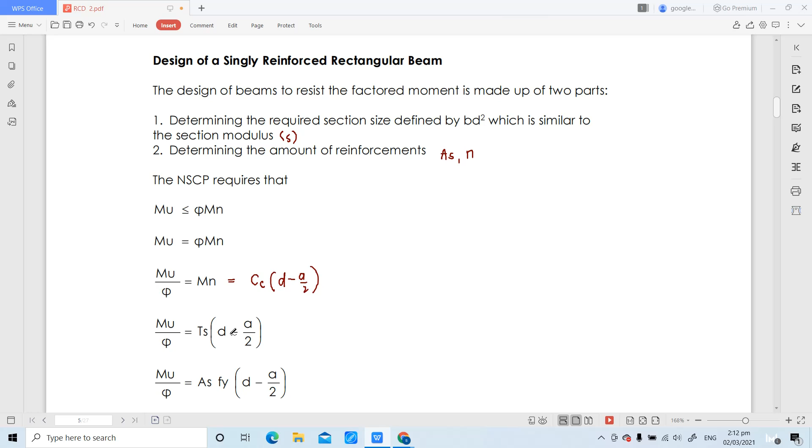And that's the one we used. Our tension force of the tension bars, Ts, is equivalent to AS Fy. So Ts should be equivalent to AS Fs, but for this we assume that our steel bar has yielded, that is why we are using Fy here.

Then we will substitute the value of A. What is the value of A? It can be computed by taking summation of forces along X, or C equivalent to T. The compressive force is 0.85 Fc prime AB, and the tension T is AS Fy. To get the value of A, divide both sides by 0.85 Fc prime B, so A will become AS Fy divided by 0.85 Fc prime B.

So here it is. When you substitute that, it has over 2, so the 2 will multiply with 0.85, and that will become 1.7.

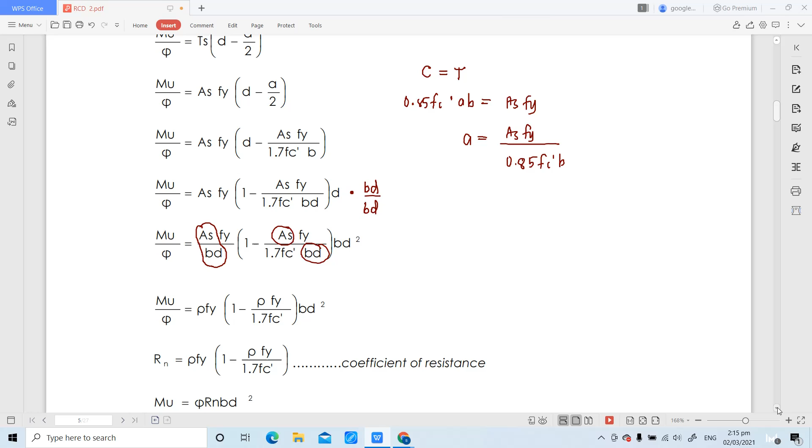And the term multiplied by BD squared, this term, is what we call the coefficient of resistance, Rn. Therefore, Rn is equivalent to rho Fy multiplied by 1 minus rho Fy over 1.7 Fc prime. So you just substitute this, and it becomes Mu over phi equals Rn BD squared.

Cross-multiply the phi, and this becomes the form: the ultimate moment is phi Rn BD squared. And with respect to the coefficient of resistance formula, when we distribute rho Fy, that will become...

Rn equivalent to rho Fy multiplied by 1, that is rho Fy, minus, it will be distributed here, that will become rho squared Fy squared over 1.7 Fc prime. And as you can see, this is a quadratic equation. There's a term with rho squared, a term with rho, and in the last term, there's no rho.

So Rn will be considered as a constant term. It follows the equation for a quadratic equation: Ax squared plus Bx plus C equivalent to 0. So this equation can be considered a quadratic equation.

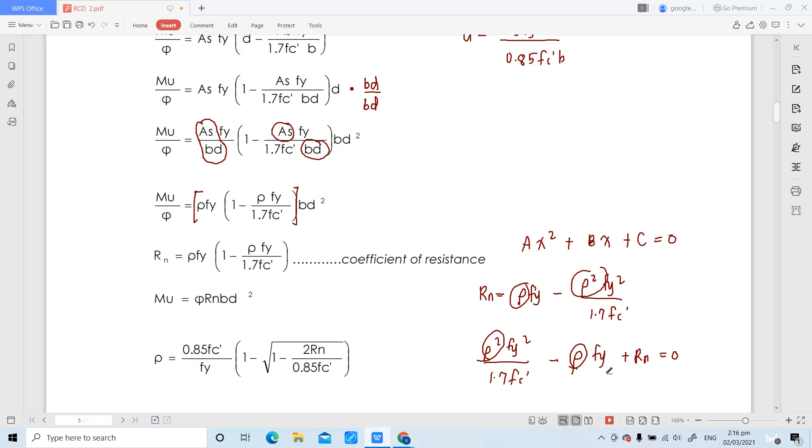If you transpose that, it becomes rho squared Fy squared over 1.7 Fc prime minus rho Fy plus Rn equivalent to 0. There's a variable rho squared, a variable rho, and a constant with no rho—that is a quadratic equation. So since it's a quadratic equation, we can solve the roots of rho using the quadratic formula.

So kapag substitute natin lahat ng term, dito A is Fy squared over 1.7 Fc prime. B is negative Fy. C is coefficient of resistance Rn. So substitute mo itong mga values na to sa ating quadratic formula, you will be able to get this formula or root for the value of steel ratio rho. That steel ratio is equivalent to 0.85 Fc prime over Fy multiplied by 1 minus square root of 1 minus 2 Rn over 0.85 Fc prime.

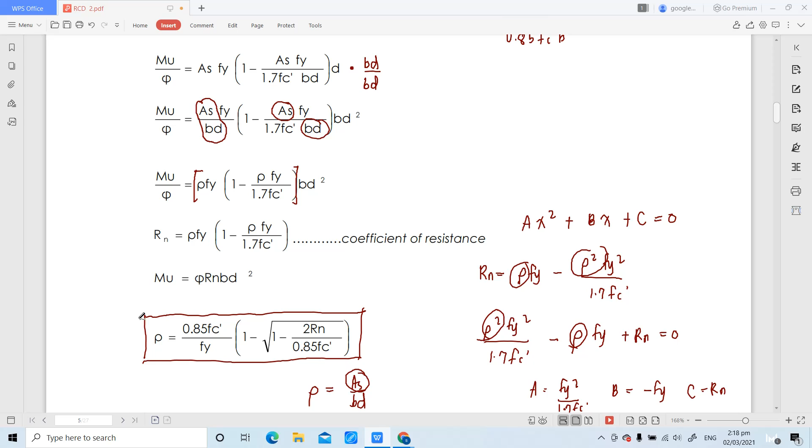Ito na yung actual steel ratio natin for the design procedure, dahil yung actual steel ratio na rho equivalent to AS over BD, hindi pa natin ito magagamit in computing the value of rho dahil yung area ng steel ay ating unknown dito sa design. So you have to compute first the actual steel ratio for you to get the value of AS. At ito yung formula ng actual steel ratio. Okay, you should memorize or familiarize yourself with respect to this formula.

Next one, we have also included here the design process. Etong steps na nakalagay dito, nasa letter B part. Yung process na nakalagay, kapag binigay na mismo sa problem yung value ng effective width B, o yung width B, tsaka yung effective depth D, kapag meron ng binigay na dimensions yung ating section, determining the amount of reinforcement na tayo.

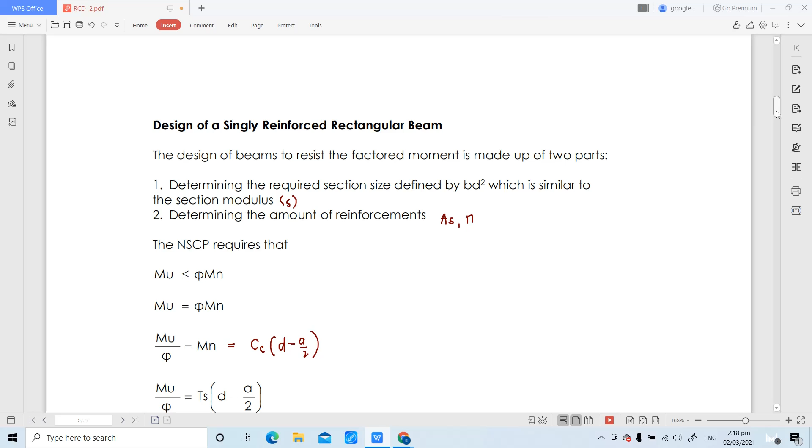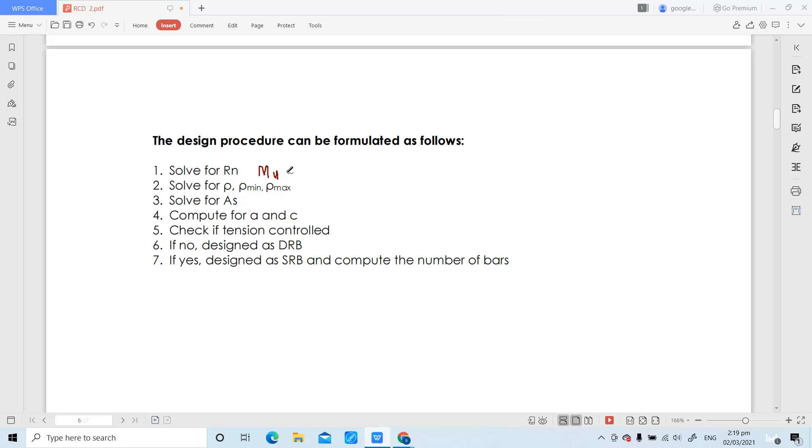And for determination of the amount of reinforcement, ito yung steps or ito yung procedure. First step is to solve for the coefficient of resistance Rn, at mako-compute niyo yan using the formula of ultimate moment, that Mu is equivalent to phi Rn BD squared, with assumptions. May assumptions tayo dyan dahil yung reduction factor phi, meron tayong tatlong classification for that, at hindi pa natin alam kung saan siya magpo-fall na classification.

So i-assume nyo. Number 2, we have to solve for the steel ratio, actual, and then check the adequacy. Solve mo yung rho minimum tsaka rho maximum also. Para maging adequate siya, a singly reinforced requirement, dapat ang actual steel ratio is less than rho max but greater than rho minimum. Kapag rho ay greater than rho maximum, that will fall under doubly reinforced beam, and we don't want that to happen.

Dahil wala pa naman tayo kay doubly reinforced requirement. Pag na-solve na natin si doubly reinforced or na-discuss na natin to, pwede na maging ganyan yung requirement natin or condition natin. But for now, dapat hindi natin makuha itong condition na to dahil singly reinforced pa lang po tayo.

Okay, so pag magpo-fall tayo dito sa condition na yan, we have to solve for AS. And AS is rho BD. Eto na siya, oh. Na-solve nyo na yung AS. Diba ito yung goal natin? Pag may binigay na ultimate moment, we can now solve for AS.

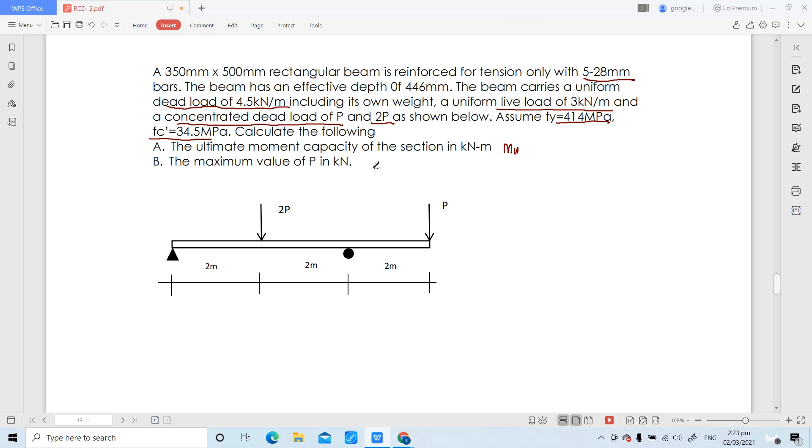Okay, so for this example, we have a 350 mm by 500 mm rectangular beam, and it is reinforced for tension only with 5-28 mm bars. The beam has an effective depth of 446 mm. The beam is to carry a uniform dead load of 4.5 kN per meter, including its own weight, a uniform live load of 3 kN per meter, and a concentrated dead load of P and 2P as shown below. We will use yield stress of steel bar 414 megapascal, compressive strength ng concrete 34.5 megapascal. We are required to calculate the ultimate moment capacity or Mu in kilonewton meter and the maximum value of P in kilonewtons. Okay, analyze the problem.

Let's draw the section first.

Meron tayong rectangular section na binigay. It is reinforced sa tension side lang with 5 28 mm diameter bars. Ang ating width ay 350 mm. Effective depth is given also 446 mm. Therefore, yung 500 na binigay doon, that will be considered as the total thickness of the beam.

And the yield stress of steel bar is 414. The compressive strength of concrete is 34.5. For this problem, this is analysis or investigation, dahil may binigay na area ng bakal or number ng bakal and then pinapa-compute yung moment capacity.

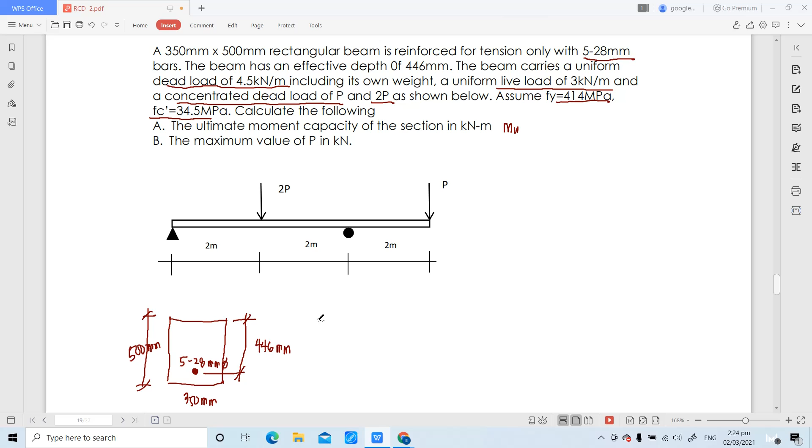If that is the case, nasa analysis pa lang tayo, hindi pa design, dahil kapag design, ibibigay yung moment capacity at ang ipapa-compute ay number of bars. Baliktad. Okay, so analysis pa rin daw. Anong unang ginagawa kay analysis?

We will check the adequacy requirement. Okay, para ma-check natin kung adequate tayo, determine first minimum steel ratio. Ang minimum steel ratio, meron tayong dalawang formula.

Nakabase yun kay Fc prime. Ang Fc prime ay greater than 31.36, so we will be using 0.25 square root of Fc prime na 34.5 over Fy na 414. What is minimum steel ratio? 0.0035.

Get the value of maximum steel ratio. This is 0.85 beta 1 Fc prime over Fy multiplied by 3 over 7. But before we get this, check first the value of beta 1. Nakadepende rin kay Fc prime. 34.5 ang Fc prime, that is within the range of 28 and 55, so that is condition number 2 or second condition.

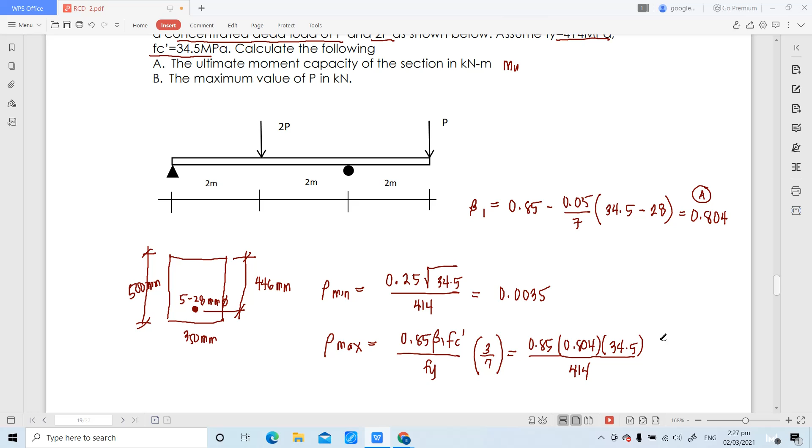804 po. Store the value as A. And then get the value of rho max. That is 0.85, ang beta 1 ay 0.804, Fc prime 34.5, Fy is 414, multiplied by 3 over 7. What is rho max? 0.0244.

0244, tama po yung naisulat ko? Opo sir. Okay, get now the value of actual steel ratio, AS over BD. Ang area ng steel, meron tayong 5, ang diameter ay 28, over B 350, effective depth of 446. What is actual steel ratio? .0197.

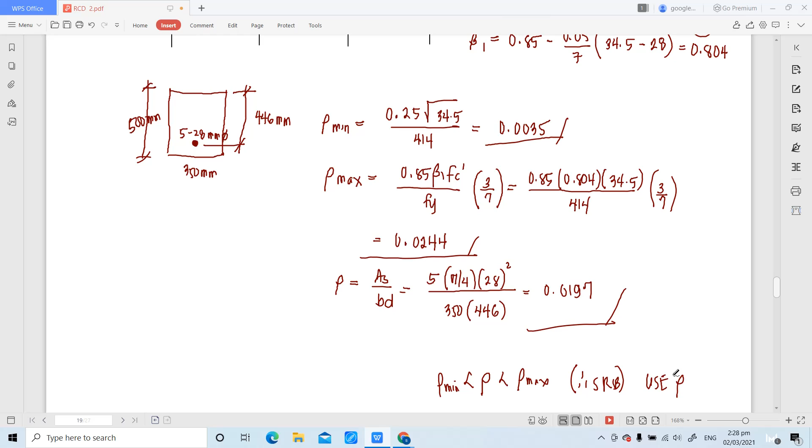Okay, now check. Compare the values of rho min, rho max, and rho. Do we have an adequate section? Nagfo-fall ba siya, less than rho max, greater than rho minimum? Opo sir. Okay, so therefore singly reinforced tayo, so use rho actual, or you will be using rho equivalent to rho actual.

Okay, let's continue. Anong next step natin dito? We will be taking summation of forces equivalent to X, summation force along X equivalent to 0. Meron tayong mga assumptions dito, assume natin steel yields, and ito yung condition na i-check: Fs should be greater than or equivalent to Fy.

Ano ang C? 0.85, Fc prime 34.5. A is unknown. The width is given 350. Tension T is As Fy. So okay daw gamitin yung 5 bakal, no need na paliitin yung value and palakihin yung value. So that is 5 pi over 4, 28 squared multiplied by Fy na 414. What is the value of depth of compression block A?

124.185. Tama ba yung naisulat ko? Opo, tama po. Get the value of the depth of neutral axis.

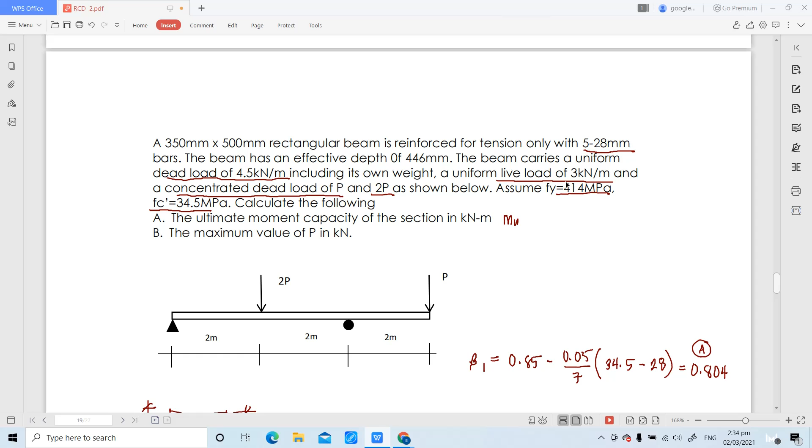Kapag i-redraw natin yan, meron tayo uniformly distributed load dito. And then meron tayong 2P here. Ito ay P. Yung ultimate moment ng section natin, that will be equated to the maximum moment ng ating beam, provided na yung ating loadings should be in ultimate conditions also.

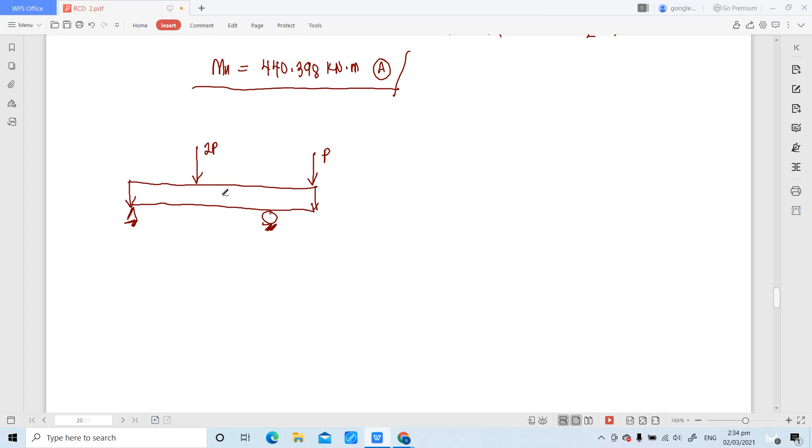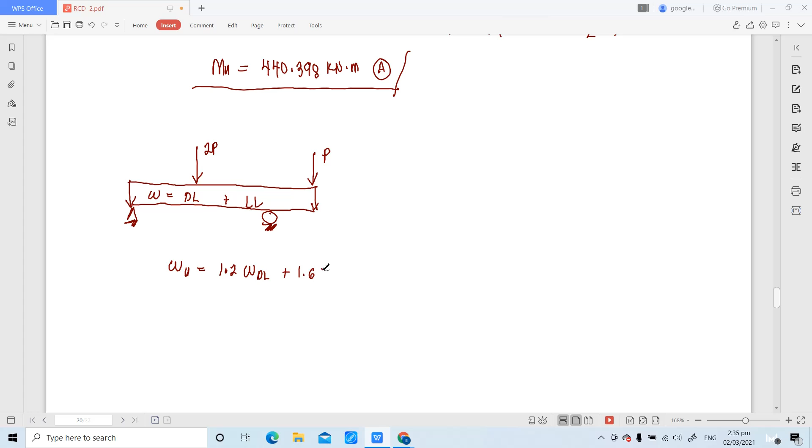Kaya lang yung mga loadings hindi pa naman ultimate load dahil hindi sinabing factored load sila. Therefore, para maging ultimate load, ifa-factor nyo siya. Eto may binigay na dead load, eto may binigay na live load. So, eto, gagawin natin ultimate load. Tama? So, that will become 1.2 dead load plus 1.6 live load, naka-factor na by 1.2 yung dead load tsaka by 1.6 yung live load.

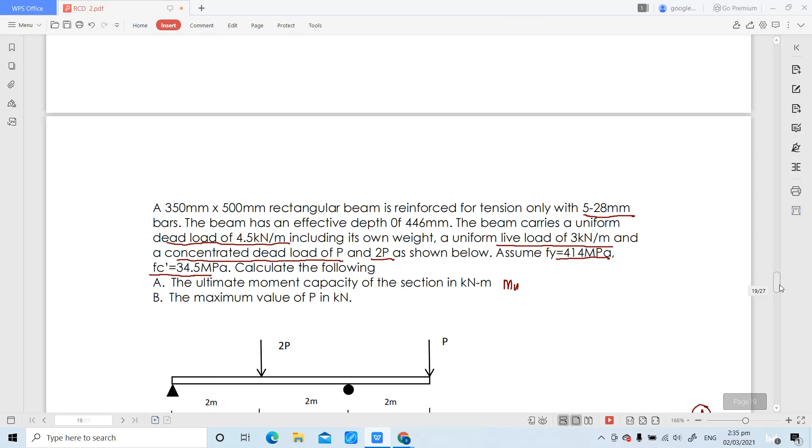So, that is 1.2. Ang dead load na binigay ay, let's check. Dead load is 4.5. Ang live load ay 3. So, dead load ay 4.5 plus 1.6 live load is 3. What is our ultimate uniform load? 10.2 kilonewton per meter.

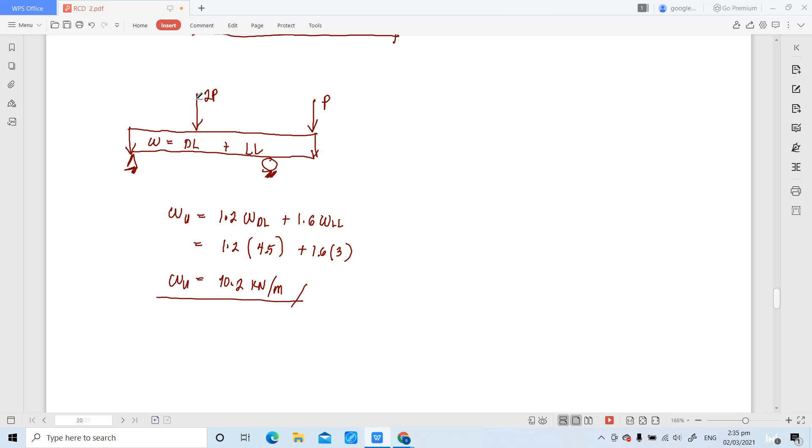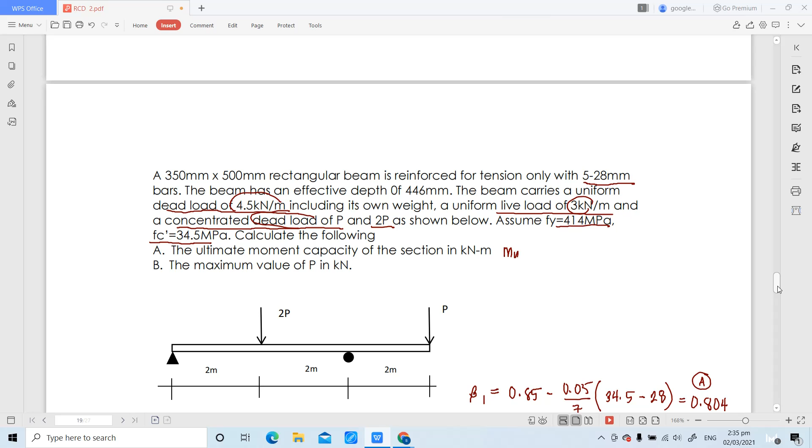Same with our 2P and P. Ano ba sinabi sa problem sa 2P and P? Concentrated dead load. Since dead load sila, may factor din sila. Ano ba yung pinakamagandang factor na gagamitin for dead load? 1.2, dahil kinonsider natin live load. So, 1.2 here. Ito ay 1.2.

No? So, ito ay magiging 2.4P. So, redron lang natin ulit yung biga natin. So, ito ay magiging 2.4P. Ito ay magiging P. Itong uniform load natin ay magiging 10.2 kN per meter. So, using this, ito ay magiging 1.2P. So, using these loadings, naka-ultimate loadings na yan.

Therefore, yung maximum moment na mako-compute dito will be equated to the ultimate moment of section. Kaya lang, nasan ba yung maximum moment ng ating beam loaded shown? So, you have to analyze that. Papasok ngayon dyan si deformable bodies or strength of materials or yung ating theory of structures.

Ito, madali pala naman, simply supported. Therefore, kahit ang method na gagamitin nyo ay shear and moment diagrams or shear and moment equations. So, let's get the value of maximum moment. Meron tayong reactions sa supports.

Say this is point A, ito ay point B. This is reaction at A, reaction at B. For us to get the maximum moment, get first the value of the reactions at support.

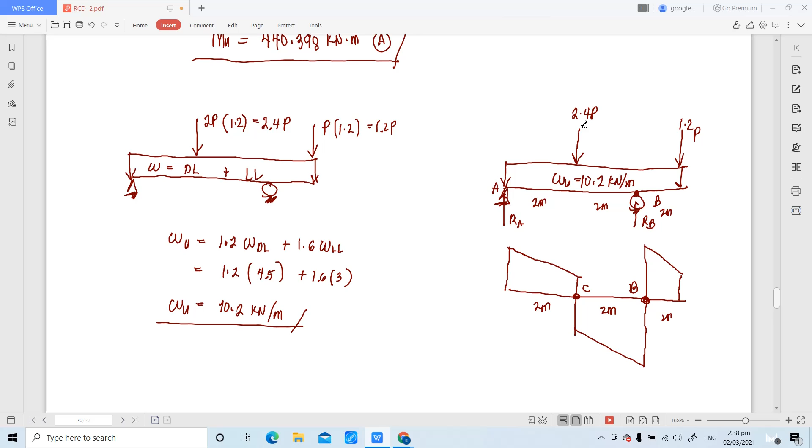2 meters ito, 2 meters, 2 meters. No need to compute where is the location of maximum moment. Ito ay 2 meters, 2 meters, 2 meters. Ito ay si point B. Say this is point C, yung point of application ni 2.4P. So, nakay point B, nakay point C yung maximum moment values natin.

So, we will analyze that. Bago natin i-analyze, determine first the reaction at A. So, paano natin masasolve yung reaction at A? We will take summation of moment at point B. We will take clockwise rotation is positive. So, for that, we have reaction at A multiplied by a perpendicular distance of 4 meters.

Tama? Yung 2.4P, anong galaw? Papunta kay point B, counter. So, that is negative moment.

2.4P multiplied by perpendicular distance of 2 meters. Yung 1.2P papunta kay B clockwise, so positive moment. 1.2P multiplied by a perpendicular distance of 2 meters ulit.

How about uniform load? Papunta kay point B. Is that a negative moment or a positive moment? Positive ang galaw? Or negative? That should be negative, counterclockwise, dahil mag-a-act yun sa gitna, di ba? Ang gitna niya ay 3 meters. So yan na yung load, papunta doon, counterclockwise. So minus 10.2.

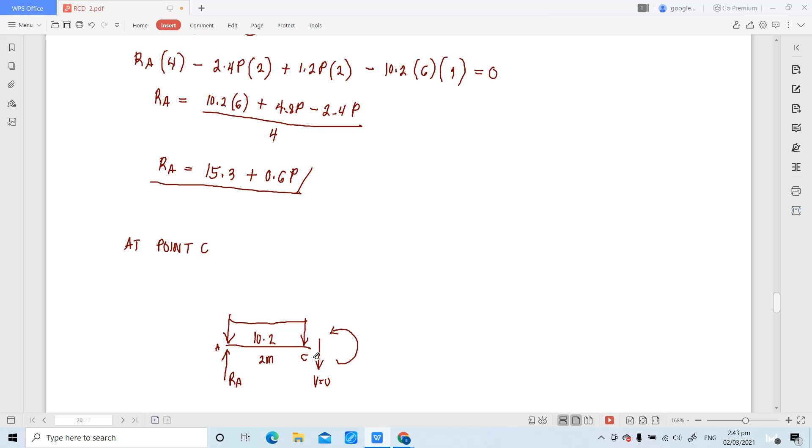So para makompute sa Mmax, we will take summation of moment at point C, equivalent to 0. Sabihin natin, lahat ng clockwise rotation ay positive. So yung Mmax, that is negative yung rotation niya with respect sa positive rotation, so that is negative Mmax. And then yung RA, papunta kay point C, positive rotation, plus RA times 2 meters. Yung 10.2 papunta kay point C, counterclockwise, so minus 10.2 times the base 2 multiplied by the moment arm, yun yung distance ng centroid niya papunta kay point C, 1 meter, equivalent to 0.

Mmax yung kinukuha, di ba? Lipat mo dun sa kabila para maging positive. Ano natira? Reaction at A. Ano ba yung reaction at A? 15.3 plus 0.6P multiplied by 2, minus, ito ay 20.4.

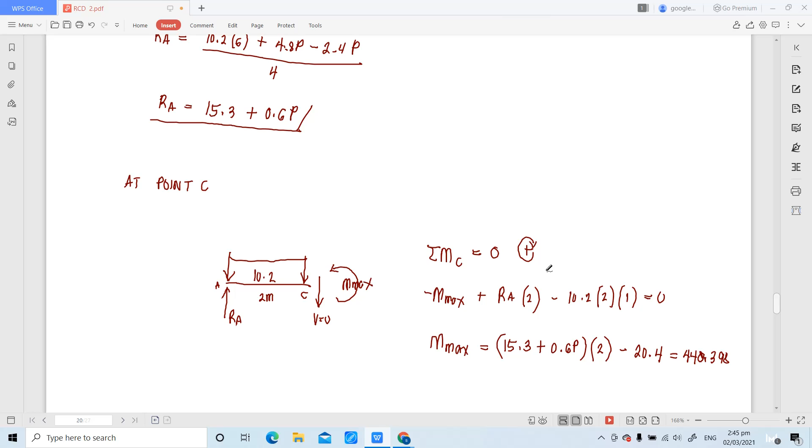Yang Mmax na yan will be equated to the ultimate moment of the section, dahil etong loadings na ginawa natin ay naka-ultimate load na. So ito ay equated to 440.398 kilonewton meter, naka-store na yan kanina, check nyo na lang po. Naka-store kay A, 440.398. And as you can see sa ating equation, load P na lang yung unknown. So you can now compute for the value of P. Ano po yung value niya?

358.4982. Same answer po dun sa iba? Opo sir. Okay, yan yung isang value ng P. Opo, pero meron pa tayong isang makokompute na P dahil dalawa daw yung points of maximum moment natin.

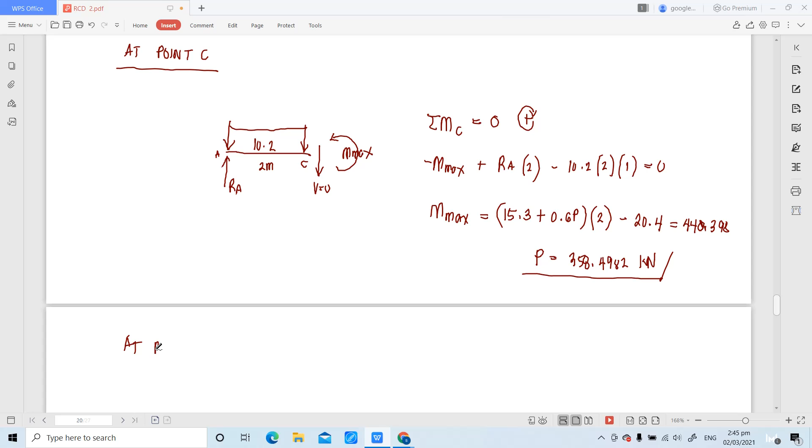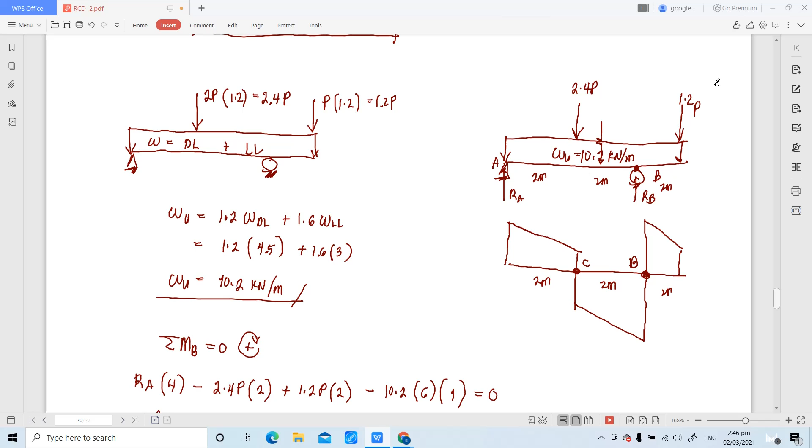Okay, so let's consider at point B. Isa-section din natin yan, sa roller support. Kapag nag-section tayo sa roller support, mas magandang i-consider yung right side section kaysa yung left side. So kapag i-consider natin yung right side ng point B, ito yung makikita nating loading.

Ito si 1.2P, ito si 10.2 kN per meter, ito si point B. Yung reaction sa roller support at point B, hindi rin natin i-consider dahil doon tayo naghati. Ito ay 2 meters. Pagpalagay natin, yung sa point B ay maximum negative moment.

Pag negative moment, considering right side section, ganyan yung galaw. Pero pag sinabi yung maximum positive moment siya, ang galaw niya ay ganyan - it should be clockwise, considering right side section. Dito kinonsider lang natin negative moment yung makokompute natin kay point B.

So this is Mmax. Para makompute yung Mmax na yan, we will take summation of moment at point B, assuming clockwise rotation is positive. So eto, negative - that is negative Mmax dahil siya ay counterclockwise.

Okay, negative. Yung 10.2 papunta kay point B, clockwise, so positive: 10.2 times the base 2 multiplied by perpendicular distance 1. Yung 1.2P papunta kay point B, clockwise din, plus 1.2P multiplied by perpendicular distance of 2 meters.

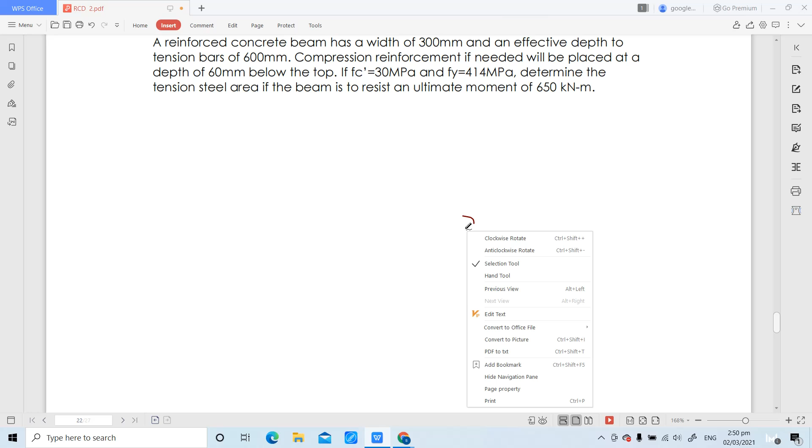Okay, so we have here a reinforced concrete beam has a width of 300 millimeters and an effective depth to tension bars of 600 millimeters. Compression reinforcement, if needed, will be placed at a depth of 60 millimeters below the top. If the compressive strength of concrete is 30 megapascal and the yield stress of the steel bar is 414 megapascal, determine the tension steel area if the beam is to resist an ultimate moment of 650 kilonewton meter.

So yung problem na ito is design problem dahil merong binigay na moment capacity, at ang pinapakompute yung required tension steel area AS. Dito sa problem, sabi dyan, compression reinforcement if needed will be placed at a depth of 60 mm below the top. Pag merong compression reinforcement, doubly reinforce tayo. So i-check natin kung doubly reinforce ba itong problem na to or singly reinforce.

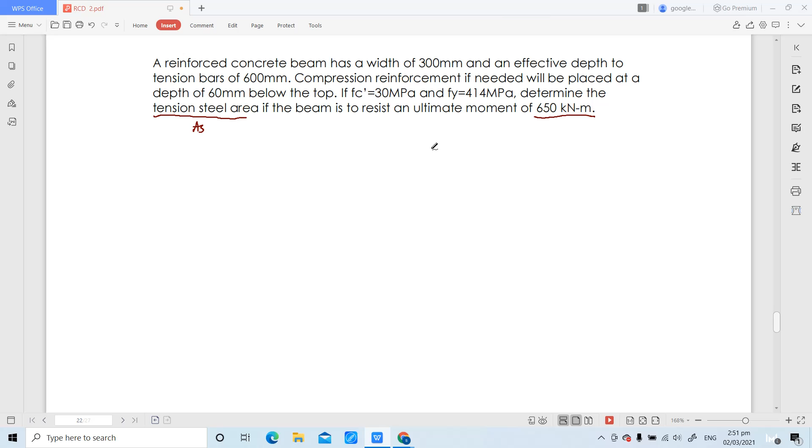So para ma-check natin, first step, mapapansin nyo itong problem na to, meron ng width na binigay, meron ng effective depth. So determination of the amount of reinforcement. At para dyan, first step is to compute the value of Rn, coefficient of resistance, mako-compute yun using Mu equivalent to phi Rn B d squared.

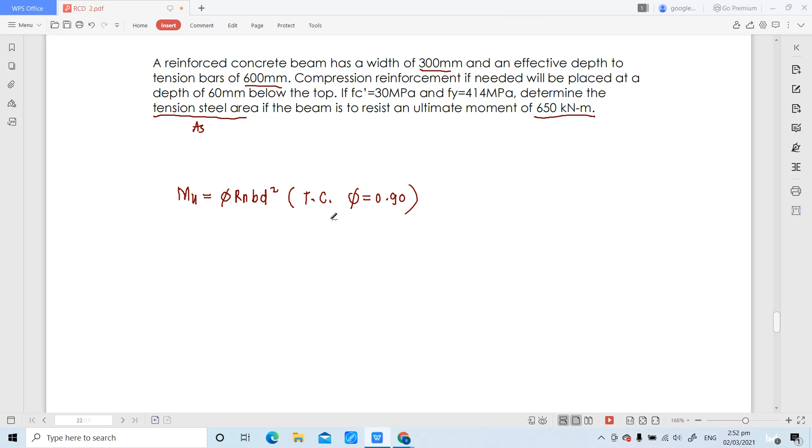Dito meron tayong i-assume na condition dahil yung phi, meron tatlong condition o classification. Assume natin na siya ay tension controlled - ito yung kailangan natin. Mas magandang dinedesign natin yung biga natin or structural element natin as tension controlled kaysa sa ibang classification, dahil mas maganda yung kind of failure na to compared to compression controlled. But we have to check kung tamang tension controlled siya.

So Mu is given 650 kilonewton meter. You have to observe consistency of units - i-convert mo into Newton millimeter, gagawin mo siyang, o magmumultiply ka ng 1 million, o times 10 raised to 6. At sa pamamagitan nun, magiging Newton millimeter na yung ating unit.

Equivalent to phi - in-assume natin tension controlled, so that is a value of 0.90. Rn is unknown. The value of width B is 300 millimeters, the value of effective depth d is 600 millimeters, quantity squared. As you can see, Rn is unknown - masosolve nyo na. Ano po yung value ni Rn?

6.687 Megapascal. Since mm squared cancels, it will convert to Newton. So, Newton per mm squared will be a megapascal.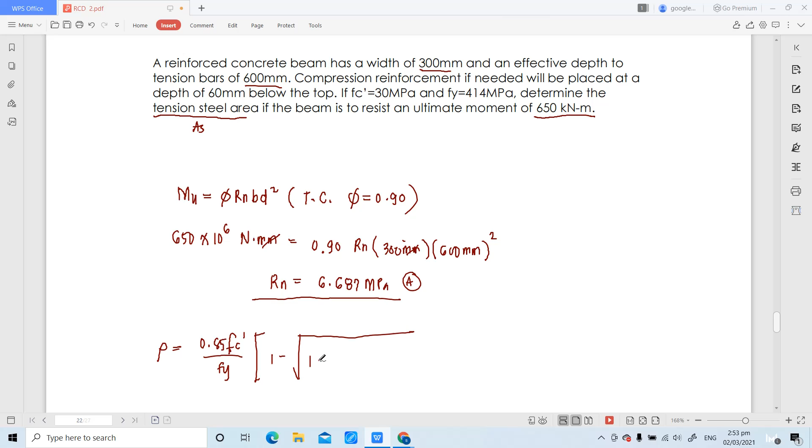Store the value of Rn as A. Once we compute Rn, we can now compute the actual steel ratio, which is rho. That is 0.85 Fc prime over Fy multiplied by 1 minus square root of 1 minus 2Rn over 0.85 Fc prime.

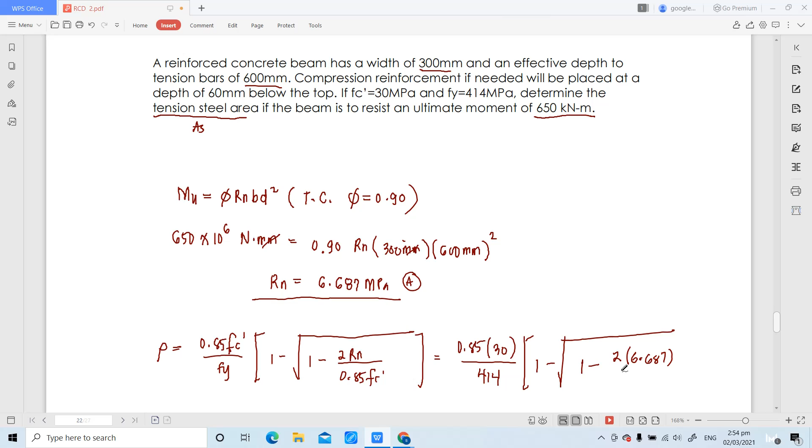Now substitute the values. We have 0.85, the Fc prime given as compressive strength 30, over Fy 414, multiplied by 1 minus square root of 1 minus 2 multiplied by Rn, stored as A, which is 6.687, over 0.85 Fc prime 30.

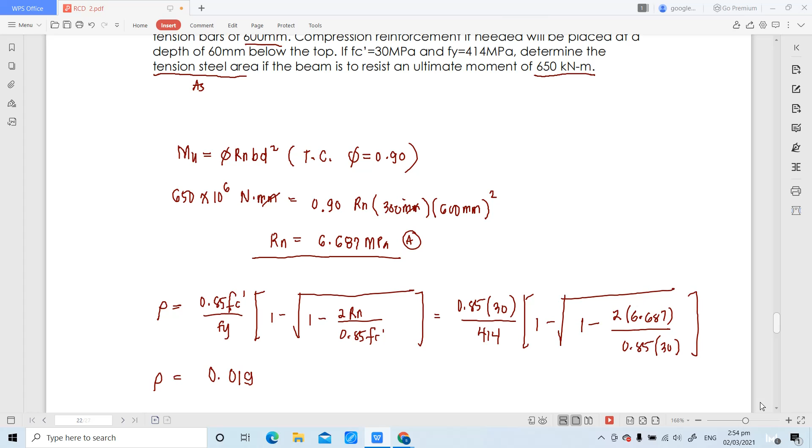So what is the value of the actual steel ratio? 0.019. Same answer as the others? Yes, sir. Check the adequacy requirement.

Get the value of rho minimum and rho maximum. For rho minimum first - rho minimum is based on Fc prime. So if Fc prime is less than 31.36, the rho minimum formula is 1.4 over Fy, which is 414.

What is our minimum steel ratio? 0.00338. Okay, how about rho maximum?

Formula: 0.85 beta 1, Fc prime, over Fy multiplied by 3 over 7. But first, analyze beta 1. Beta 1 depends on Fc prime. So if greater than 28 and less than 55, the formula is based on that. Solve for it first.

That is 0.85 minus 0.05 over 7 multiplied by 30 minus 28. What is beta 1? 0.836. Same answer as the others?

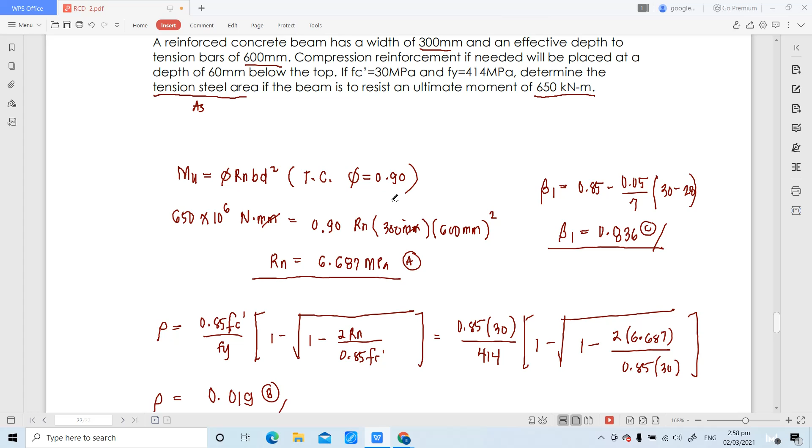So when we assume, it appears adequate. Let's check if that's correct. Since it's adequate, we will be using rho actual. Once you've computed rho actual, you can now compute AS. AS is rho times B times D. The rho to use is the rho actual, because it's within the range of minimum and maximum.

So stored as B, 0.019, multiplied by the width given, 300, effective depth 600. So multiplied by 300, multiplied by 600. What is our area of tension steel? 3,441.695 mm squared.

This is our requirement, determination of AS. But we're still not sure, as I said, so we have to check if that's correct. To check, get the value of A and C and Fs by taking the summation of forces along X.

So what is C? 0.85, the Fc prime is 30. The value of A is unknown. The value of B is 300. T is AS times Fy.

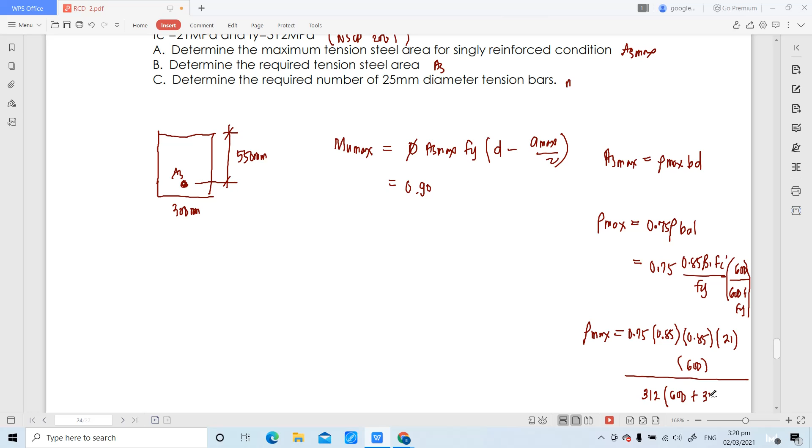That is the formula of Rho max. Compute for Rho max using these values: 0.75, 0.85, and beta 1 which depends on Fc prime. Fc prime is less than 28 and greater than 17. For the first condition, beta 1 is 0.85, Fc prime is 21, multiplied by 600 over Fy which is 312, multiplied by 600 plus Fy, so 600 plus 312. What is Rho max?

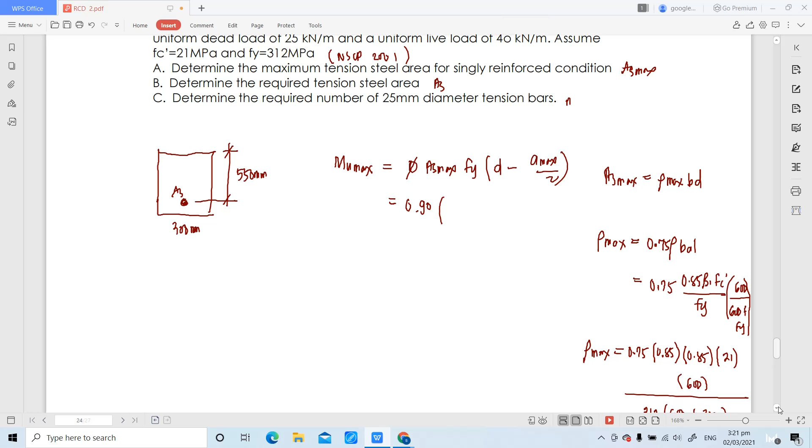Use the AS max you computed, that is 3959.17, Fy given as 312, multiplied by effective depth D 550 minus A max which we don't have yet. How can we compute A max? We will take summation of forces along X. C equals 0.85 times Fc prime which is 21, times A max, multiplied by B which is 300. This equals AS max, which is 3959.17 multiplied by Fy 312. What is our A max?

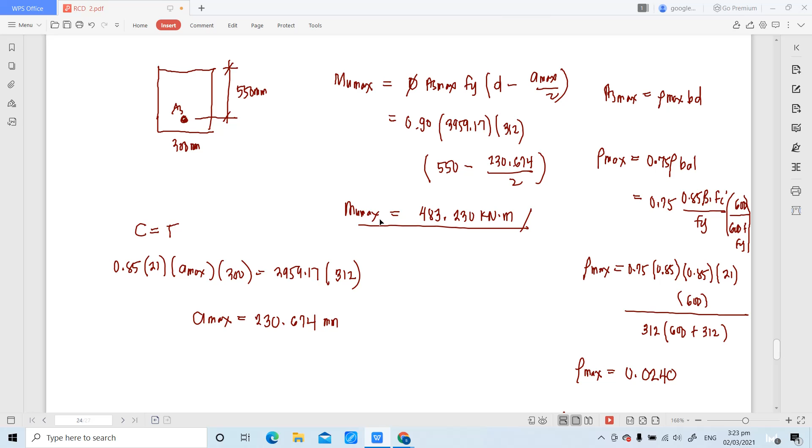Let's check if it passes as singly reinforced. Get the value of MU since none was given yet, and we can compute the ultimate moment using our loaded beam, which is simply supported over a span of 6 meters, carrying a dead load of 25 and a live load of 40. For a simply supported beam carrying a uniform load, there's a formula for that.

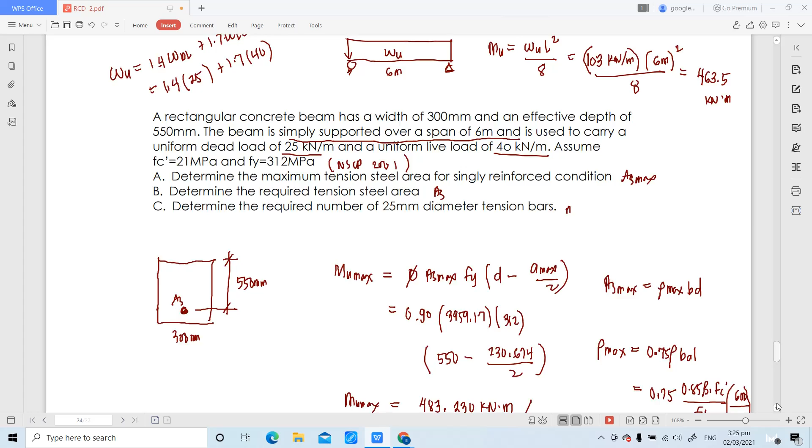Okay, store that value. Compare your MU with MU max. MU is 463, MU max is 483. Therefore we can consider that MU is less than MU max. If MU is less than MU max, that is singly reinforced. If MU is greater than MU max, that would be doubly reinforced, but that is not our case. So MU is less than MU max, so this is singly reinforced.

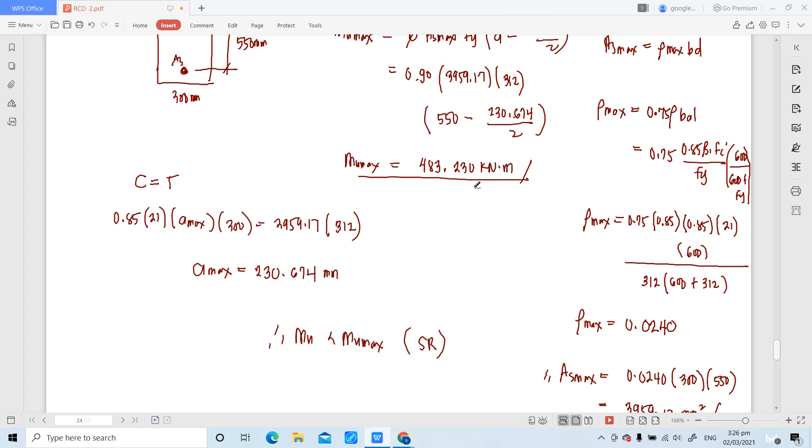So we are singly reinforced. So being singly reinforced, we can now design our beam as singly reinforced. What's the first step? Determine the value of A. Get the value of A, then get the value of AS.

For A, we will use the MU formula: phi times 0.85 FC prime AB, times D minus A over 2. Our MU is fine since it's less than MU max, that's 463.5 - convert this to Newton mm. Phi under 2001 is always 0.90. And this is 0.85, Fc prime is 21. A is unknown, B is 300, effective depth is 550, minus A over 2.

So you can compute for the depth of compression block A. What is the depth of the compression block?

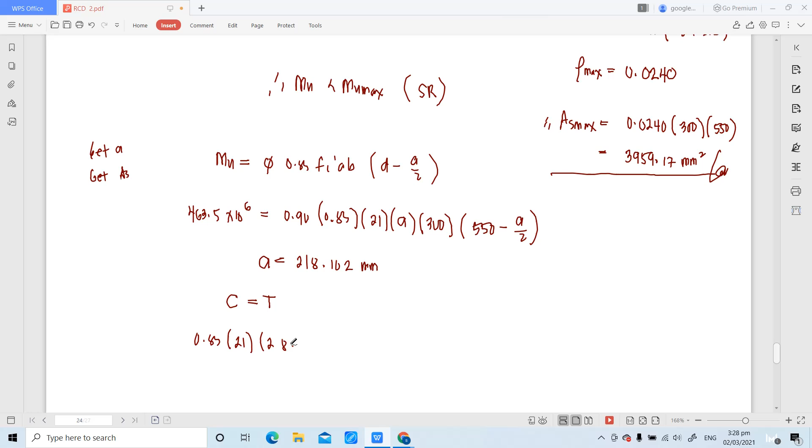218.102 is A, 300 is B, equivalent to AS which is unknown. Same answer po dun sa iba. Okay, so pag same answer, you can now solve for AS by taking summation of forces. Ang C ay 0.85, FC prime na 21. Ang FY, 312. What is the value of AS?

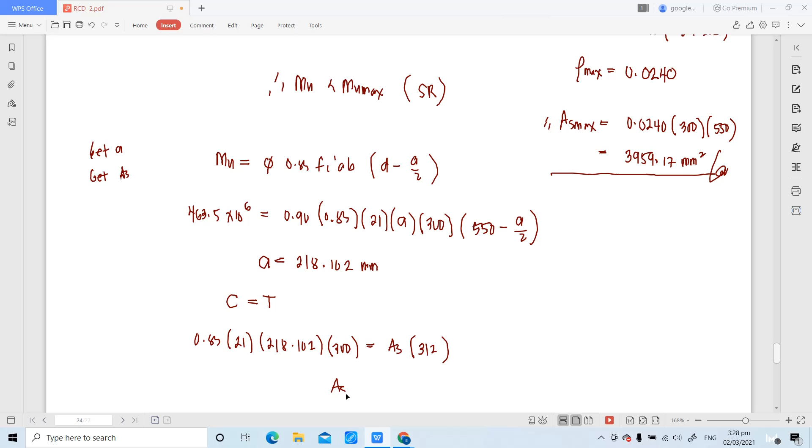3743.382 square millimeters. Same answer po sa iba. Meron na kayong AS. Kapag na-compute yung AS, ito ang first requirement, AS max, second requirement AS.

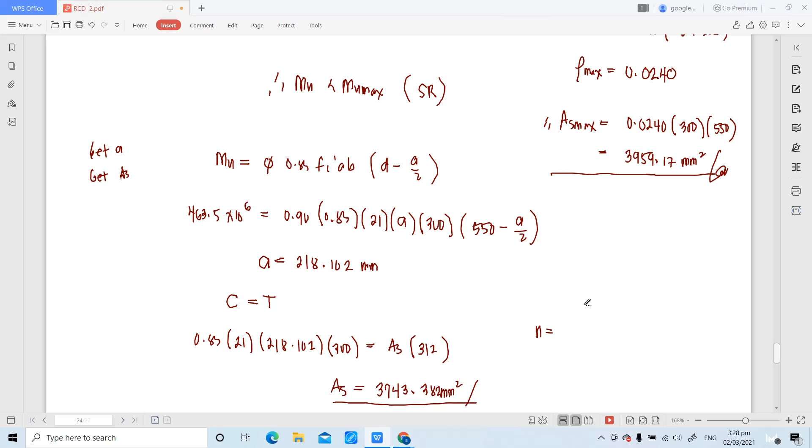Pag na-compute yung AS, you can now solve for N, the number of bars, and that is AS over AB. Ang AS natin ay 3743.382 over AB, pi over 4. Ang diameter daw ng bar na gagamitin ay 25 mm, binigay sa problem. So, 25 quantity squared, at ito ay round up po palagi. Ano po yung value ni N? 8 po. Okay, 8 pieces, yan ang sagot natin.

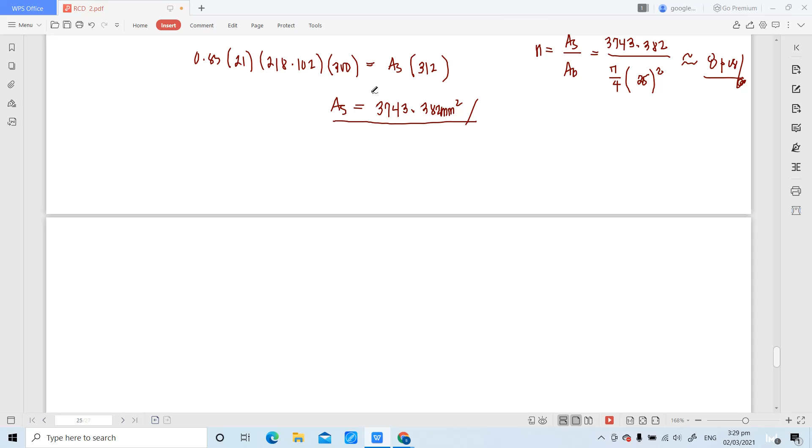For 2001, what if gagamit naman tayo ng 2010 tsaka 2015? Eto, bago nyo gamitin si AS dito guys ha, kasi dito, na-check lang natin kay maximum, so check nyo din siya kay minimum. Dapat yung AS na to ay greater than kay AS minimum.

Determine nyo nga kung greater than siya kay AS minimum. Ang rho minimum ay 1.4 over Fy, dahil ang FC prime ay less than 31.36. 1.4 over Fy na 312, ang B ay 300, ang D ay 550. Tama bang greater than yung AS kay AS minimum? Greater than tayo, okay yung 3743, okay.

What if naman kapag gagamit tayo ng another code, sabi nating 2015? Actually, 2010, 2015, parang parehas din, walang magbabago. Now, ano unang gagawin daw natin? Get the value of Rn. Paano ma-determine yung Rn? Mu is equivalent to phi Rn Bd squared.

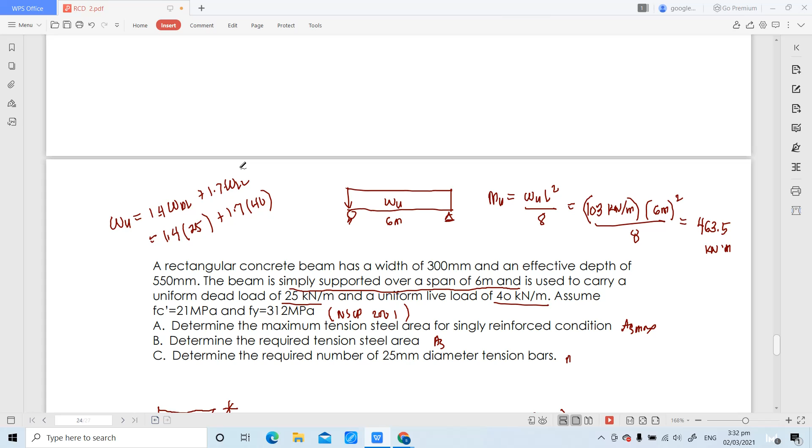So, mapapalitan yung WU. Solve for W. So, WU is 1.2 dead load na 25, 1.6 live load na 40. 25 ang dead load, live load ay 40. 94 kilonewton per meter. By that, we can compute for Mu. Ang Mu ay WU L squared over 8, that is 94 multiplied by 6 squared over 8.

What is Mu? 423 kilonewton meter, at yun yung gagamitin natin sa pagde-design. So, this is 423, convert it into Newton millimeter, magmumultiply ng times 10 raised to 6. Phi, inassume natin tension controlled.

Ang Rn, unknown. Ang B ay 300, effective depth D is 550. What is the value of Rn? Kindly compute: 2848.485. It should be squared. Ano po yung Rn? 5.179. Okay, store the value as A.

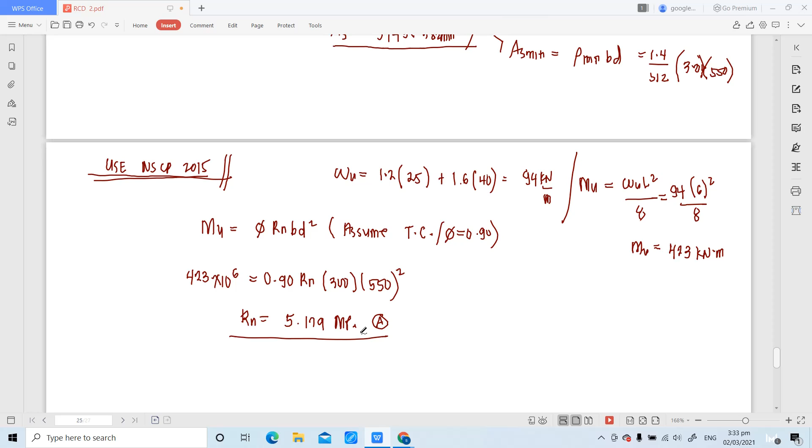Hindi tayo nag-round off. Pag na-compute yung Rn, we can now compute for the value of actual steel ratio, Rho. That is 0.85 Fc prime over Fy multiplied by 1 minus square root of 1 minus 2Rn over 0.85 Fc prime. So, this is 0.85, ang Fc prime natin 21 over Fy 312, 1 minus square root of 1 minus 2 Rn 5.179 over 0.85, ang Fc prime ay 21. So, what is actual steel ratio? 0.0201.

Okay, now check the adequacy, get the value of rho minimum and rho maximum. Ang rho minimum, 1.4 over Fy, that is 1.4 over Fy 312. Ano yung rho minimum? 0.0045, okay, how about maximum? 0.0208.

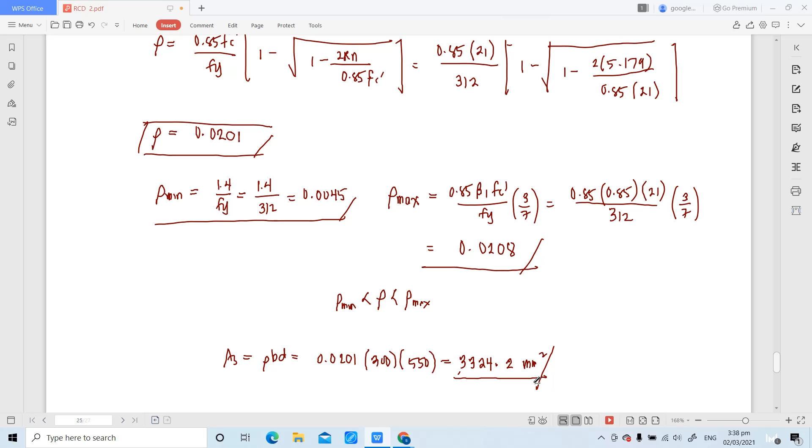Take summation of forces along X. That is 0.85 FC prime ay 21. The value of A is unknown. The value of B is 300. Tension T is AS na 3324.2. Ang Fy, 312. What is the value of A?

One nine nine, 199.681. Okay, get the value of C. Ang A ay beta 1 C. Ang beta 1, 0.85. So we can get the value of C.

227.86 millimeters. Check the assume condition. Get the value of Fs, 600. Effective depth na 550 minus C, 227.86 over 227.86. What is Fs? 848.257 megapascal. Ngayon, tama ba yung mga in-assume nating condition? Tension controlled ba tayo? Ang Fs ba ay greater than kay 1,000?

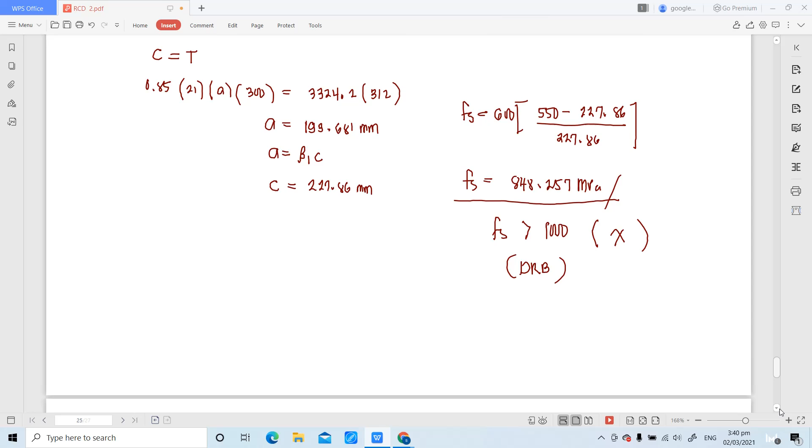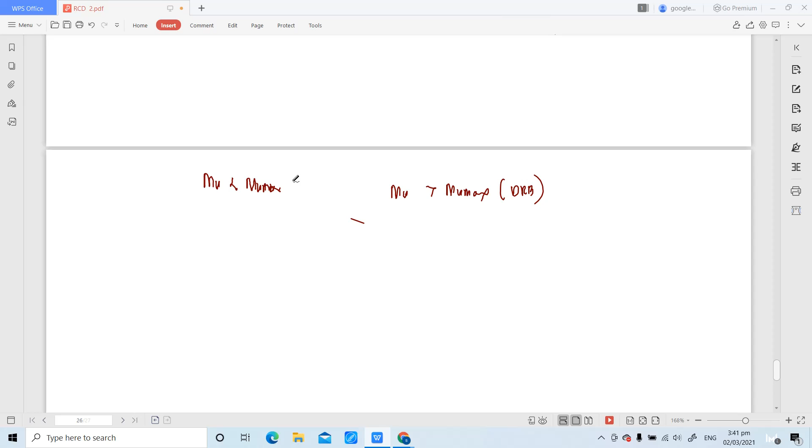Check natin kung doubly reinforced talaga siya using yung isang formula natin kanina. Check natin kung yung MU ay less than ba kay MU max, o yung MU ay greater than kay MU max. Kung hindi, ito doubly reinforced, ito singly reinforced. Yung MU natin na determine na, di ba? MU is 423 kilonewton meter. So how about MU max?

Determine natin. MU max is equivalent to phi, sabihin natin 0.85 beta 1, 0.85 FC prime AB effective depth minus A over 2. So para maging maximum yan, yung A dapat siya ay maximum condition, A max. Pwede rin yung isa, yung kay phi AS max Fy multiplied by D minus A max over 2. Either way, parehas lang po yung makocompute natin.

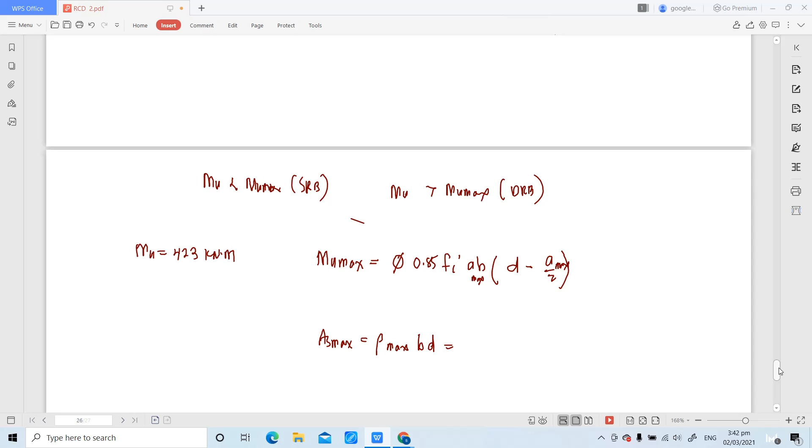Now, compute for A max. Paano makocompute yung A max? By taking summation of forces along x-axis. Pero before that, determine first AS max. Ang AS maximum ay rho max BD. Ang rho max na compute nyo na kanina, ang rho maximum ay 0.0208.

Tama po? Paki-store nga yung value nito, para nito yung nag-round off. 0.85 by 0.85 by 21 by 3 over 312 by 7. Store na.

Okay, now compute for AS max. That is rho max 0.0208. B is 300, effective depth ay 550. Ano yung AS max? 3438. 0.2. 3,438. 38.22, 38.8, 0.2? Tama ba yung 0.2? 0.23 or 8? Point 0.82. Okay, store yung value, AS max.

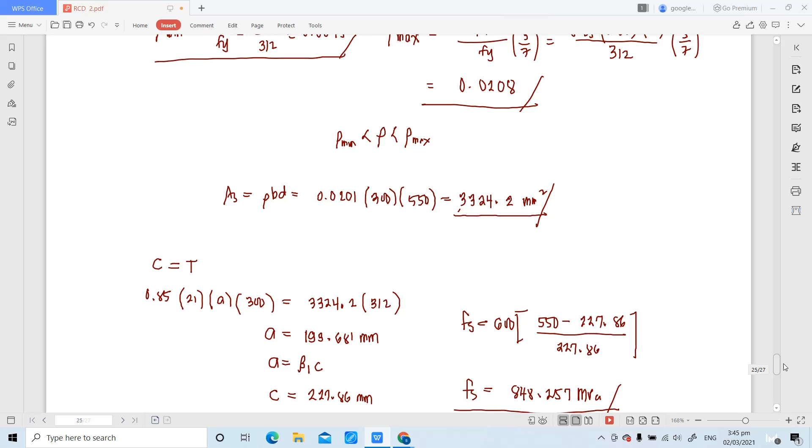200.357. So, madetermine na natin yung MU max. Bago natin madetermine yung MU max, determine first phi. Under 2010-2015, ang reduction factor phi na compute nyo na kanina. Naka-store pa ba kanina? Hindi pa, hindi pa natin na-compute.

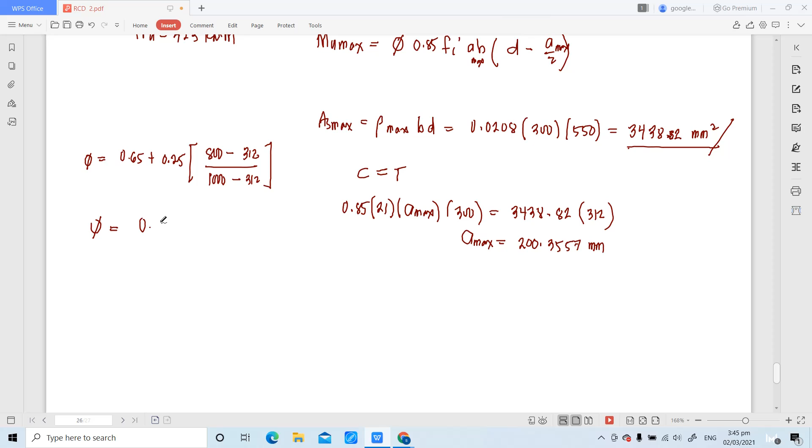So, determine first phi. Ang phi ay 0.65 plus 0.25. Ang Fs under maximum condition ay 800 minus Fy 312 over 1,000 minus Fy na 312. What is reduction factor phi? 0.0... 0.827. Okay, 827. Store the value, 827. Okay, store po yung value.

Now we can solve for MU max. Ang MU max ay phi 0.827 multiplied by 0.85. Ang FC prime ay 21. Ang A is A max, 200.36, multiplied by B na 300. Effective depth na 550 minus A max na 200.36 over 2. What is MU max? 399.283.

Same answer po sa iba. Same answer po. 399.283 po. 283. Kilonewton meter.

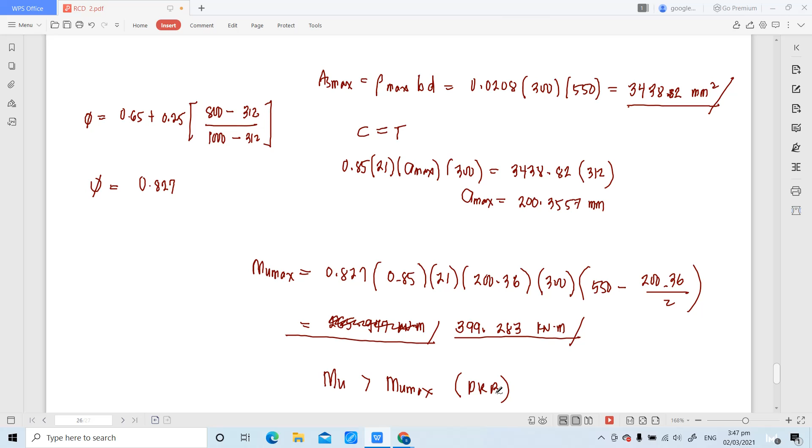Okay, now check, compare the value of MU and MU max. Ang MU ay 423, ang MU max ay 399. Ano yung comparison? MU ay greater than MU max. So kapag ganyan, that is doubly reinforced tayo. Hindi talaga natin siya ma-analyze as singly reinforced under 2010 and 2015. Ma-analyze lang natin siya as singly reinforced using 2001 NSCP.

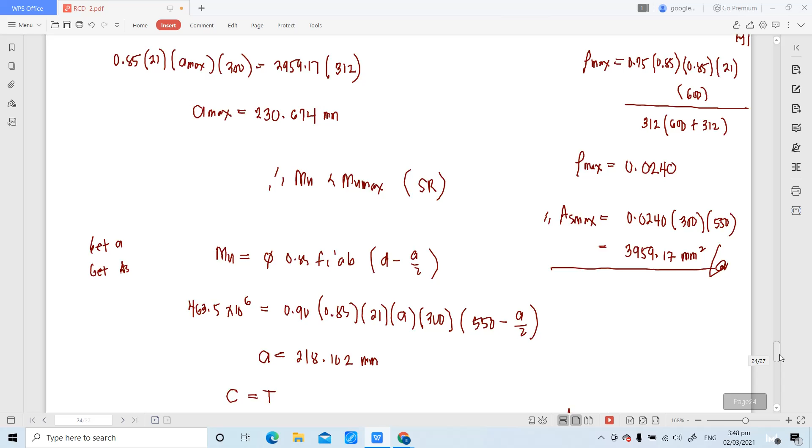So, questions po sa problem na ito?